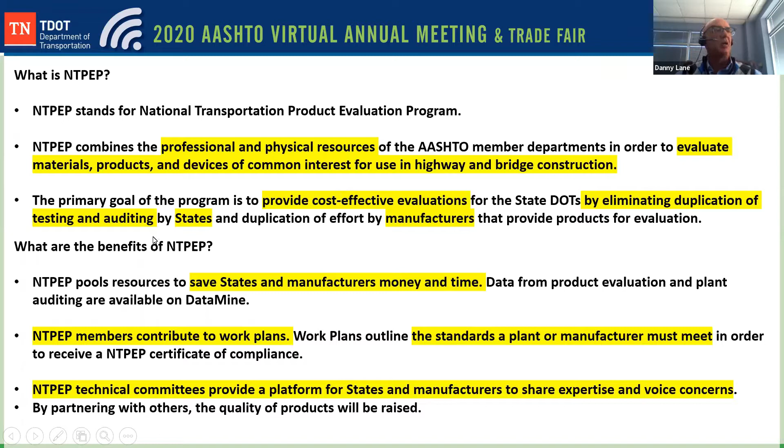So let's get started. Of course, you remember I told you I did this for the big annual AASHTO virtual annual meeting and trade fair. So I had to go through explaining a lot about what NTPEP is, and of course everybody on this call knows what NTPEP is, but I was doing this for the CEOs, so we thought they needed a little background.

Right now, Tennessee DOT has around 3,000 products on a QPL. Guys, over 1,500 of those products currently come from NTPEP evaluations. Guess what? We don't have to do that in the lab. That's half of our QPL products, and I'll show you later how that really shows up in our QPL. We don't have to do this. We can concentrate on something else. That's the confidence we have in this program over the years, and it gets better every year.

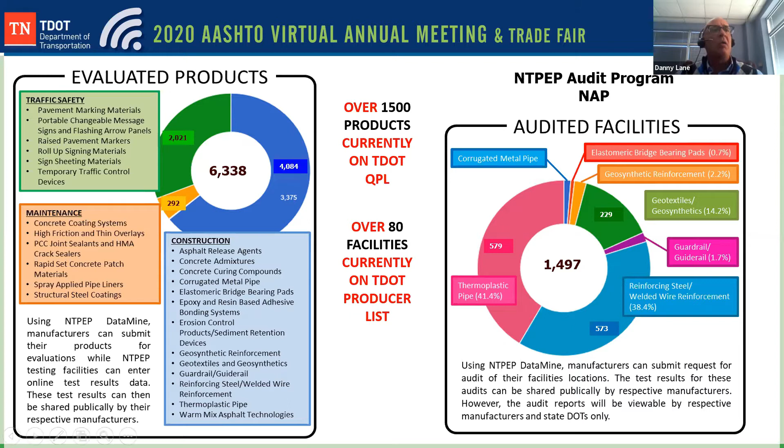Over 6,000 products evaluated, 1,497 audited facilities. Well, 80 of those facilities are on our producer list, and I'll show you how to get on that. So we are all in on this NTPEP.

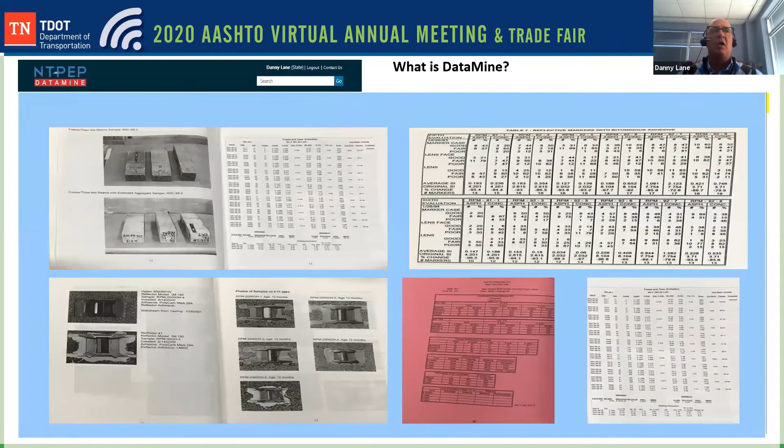Of course, I explain to them what DataMine is, the online repository, and then I show them exactly what DataMine looked like years ago. Some of you guys on this call have seen a lot of these books. We used to have stacks of them, and instead of clicking on geotextiles or concrete admixtures like you do with DataMine, you had to thumb through the pages and look for yourself. Guess what? At the time, this worked unbelievably well. We loved it. But now we have this online repository at your fingertips, and this is what you get.

So really, guys, it's a very powerful tool at your fingertips that you can use to look at specs, write your specs around whatever you want to do, and it's pictures, graphs, testing reports, and everything. It's before and after type stuff.

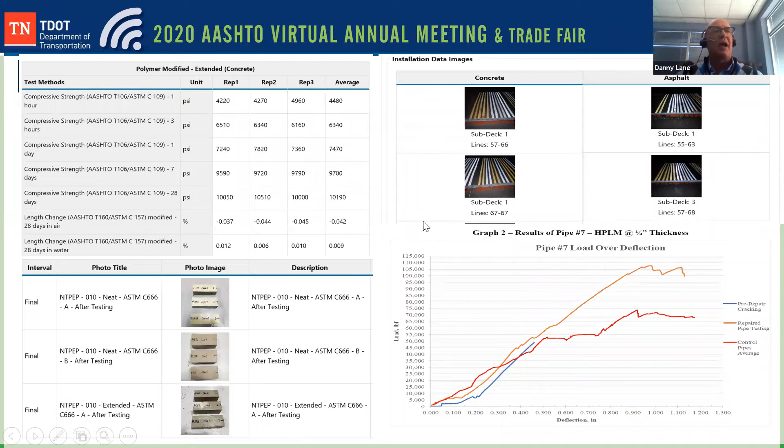It's really, really useful, guys. It is a partnership between state agencies and industries. So if a state is not accepting NTPEP evaluations and they're doing third-party testing, that industry will not go to NTPEP. But now more states are accepting NTPEP, and the industry is running to us. And that's how it works.

The strength of our committees, our technical chairs and vice chairs, and technical committee members. You don't have to be a chair or vice chair to contribute to these product evaluations. A lot of you guys are experts sitting in the audience, and a lot of you step up. That's really good. But it is a partnership between state agencies and industry partners, and that's the way it has to work. It's worked very, very well in the state of Tennessee.

This is what I showed our CEO when he first got here, about the $20,000 annual contribution and what we get out of that contribution. And I'm getting ready to show you savings, quality, reliability, independent test results. Guess what? Independent test results from all the same place. Now, it may be a contracted lab, but every product goes through that same lab. It works out really well. Everybody's treated the same.

Sharing the experience and partnering with the industry is one of the best things we've ever done, and we figured out a lot of things together, and it works out really well.

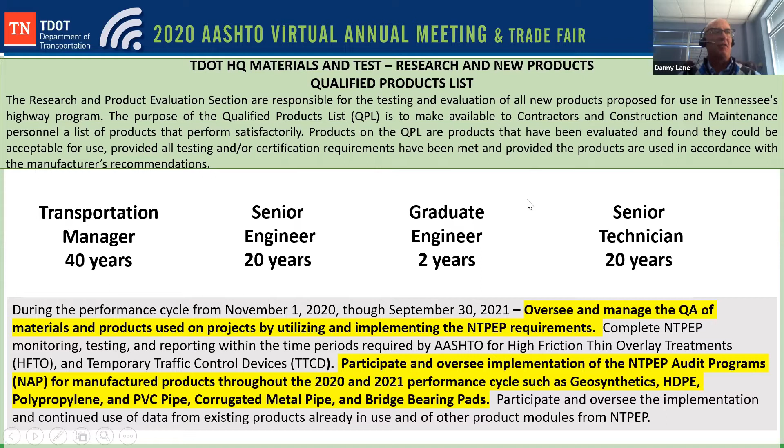Our graduate engineer covers the whole NTPEP audit program by himself, and I'll show you how that happens. So, guys, this is not rocket science, and it makes us look really, really good to our CEOs and everyone else in our department.

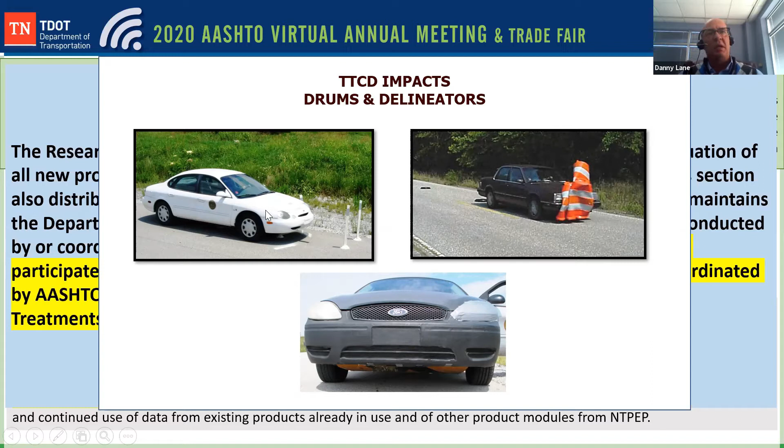We've always participated in NTPEP. Of course, most of y'all know that we used to do delineators and drums. We no longer do the delineators, TTI has taken that over. Richard Weber and Al Wilda have done such a great job continuing that effort with TTI, and I thank them both. We still do the impact and durability testing for the work zone drums.

We have also participated in hosting test decks. In 2016 and 2017 we hosted the HFTO test decks. Previously, before that, Kentucky had the test decks, and hopefully this year, I'm pretty sure it's a guarantee, Missouri is going to host the 3rd test deck for HFTO.

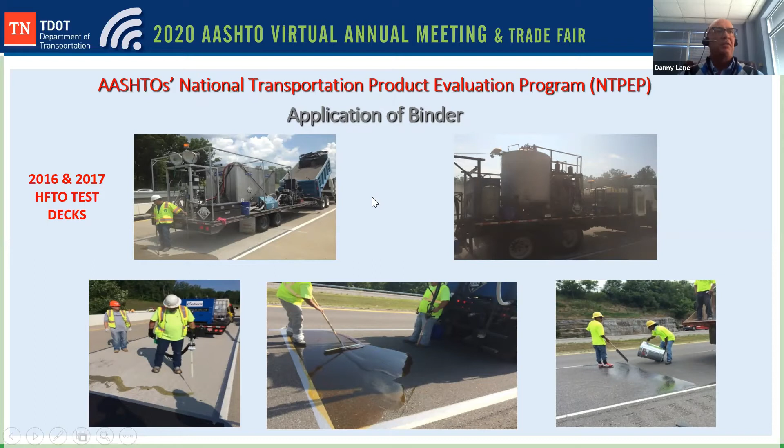I want you to look at something. This is a 3-year evaluation. We do it on asphalt pavement, concrete pavement, and concrete bridge decks. Remember, the concrete bridge decks get a double layer.

So the asphalt pavement and concrete pavement for HFTO is exactly what it is. The double lift on the concrete bridges is a bridge preservation type program that we've used for years, and we're getting ready to start on brand new bridges to get this double layer on it, so we don't have to touch it or even think about it for at least 10 to 15 years.

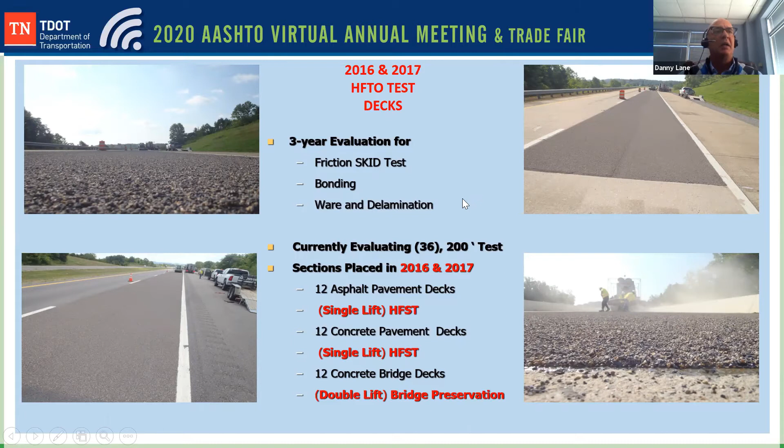So that works out. You see this number right here, this 36? We did 36 sections in the state of Tennessee alone. Kentucky did not quite that many, but there's probably over 45 products. Remember this number, over 45 products that have been evaluated by those 2 test decks, okay?

And what we do, guys, when we switch from one program, whether it's a specification, a standard drawing, or anything like that, when we decide how we're going to evaluate these products and we're going to switch to NTPEP, we give about 6 months to a year grace period to get the word out to our road builders, get the word out to contractors and everyone, that we're going to be in the future accepting only products from the NTPEP program.

And that we've always done that. And once we put it in place, we start over from there. And I'll show you some of the effects that have happened to us.

If you go to our webpage, and I will be sending this link out to Catherine, when you look at our QPL, this 45 list, you'll see that with the circles over here, you've got the procedures for each QPL.

Traffic control materials covers pavement marking, snowplowable RPMs, and anything to do with traffic controls. There's several sections inside that: there's the procedures, and then there's the products.

What happens is we write the procedures. We say, you know, this is raised and snowplowable retroreflective pavement markers. We've got an NTPEP review down there, if you'll notice, and we have a link so you can go and check everything out. And then we have our procedures and what we say these products have to meet so we can get them on our QPL list.

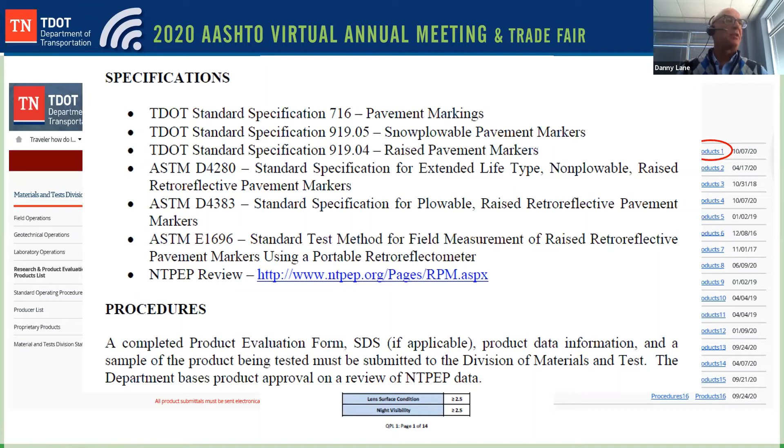And what happens after that? Site manager. It goes straight to site manager and populates in each category or each QPL list. This has worked very well.

We update the QPL every month, so if products are taken out, removed, or actually placed on, excuse me.

We do this for our bid lettings, so we know at the time a contract is let what products are on it. Contractors can get their prices and make bids. But guess what? When that contract goes to project and it's time to lay the product, if it's been removed from the QPL, they have to choose another. So it's kind of a policing thing. You may make it this month, but if you haven't been performing or didn't recertify, you may come off the next month. That's why we update it the first of every month.

If you'll notice, I'm going to go through these 45 lists, not each and every one, just talk about a few of them. Everything in red is NTPEP evaluated products. Traffic control materials, I showed you the procedures for that.

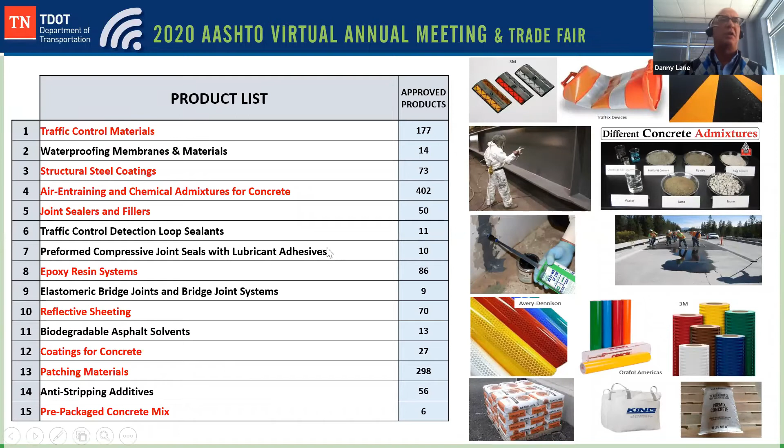Structural steel coatings, about 4 or 5 years ago we used to have it in the spec book - primer, tie coat, and top coat - with several products all over the place. We got with our Northeast friends in NTPEP, and they do the NEPCOAT QPL. We accepted that NEPCOAT QPL on all new structures. For infield corrections and repainting, we still have a separate QPL, but all new structures have to go through the NEPCOAT QPL - anything being done brand new.

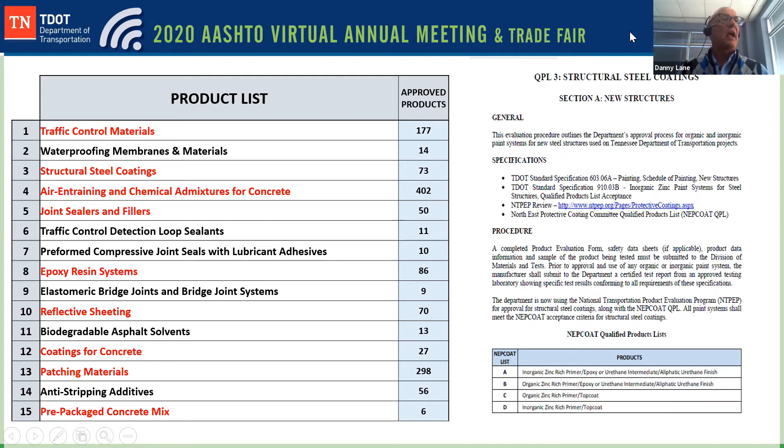Air entraining and chemical admixtures - we work with our field ops that does mix designs. An admixture isn't actually a line item, it's in a lump sum with a mix design. What happens is we update our field ops mix design drop-down list with all the admixtures that are approved. So when the designer and contractor want to submit a mix design, he knows what he gets to choose from on approved admixtures in the state. That's 402.

Patching materials alone - good guys, our guys from Ohio do a really good job with this. We actually have 2 more QPLs that play off just the data, and I've shown this to most of y'all. Just from Rapid Set data, we've written 2 more QPLs, but you have to go through NTPEP to do that. One is bag mixes for less than 2 yards per day, and the other is closure pour material. We're really excited about the data we get from these NTPEP programs - if you look at that data, you'll learn a lot about these types of products.

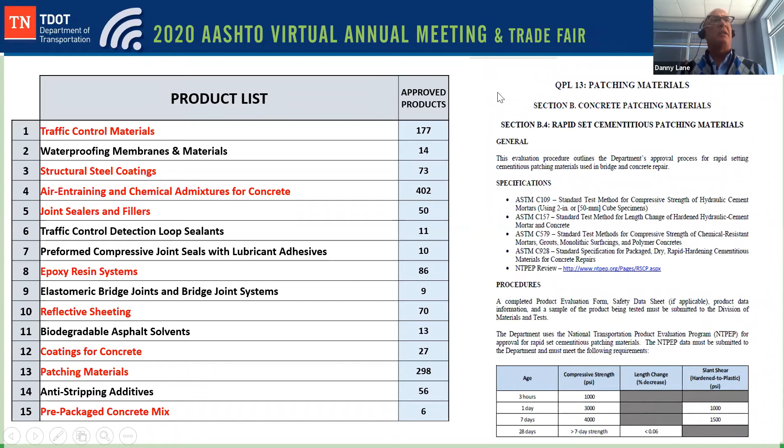Let me back up one more real quick, sorry - prepackaged concrete mixes, patching materials. Coatings for concrete is one we're currently trying to develop, and we're going to go full NTPEP when everything gets up and products get more populated.

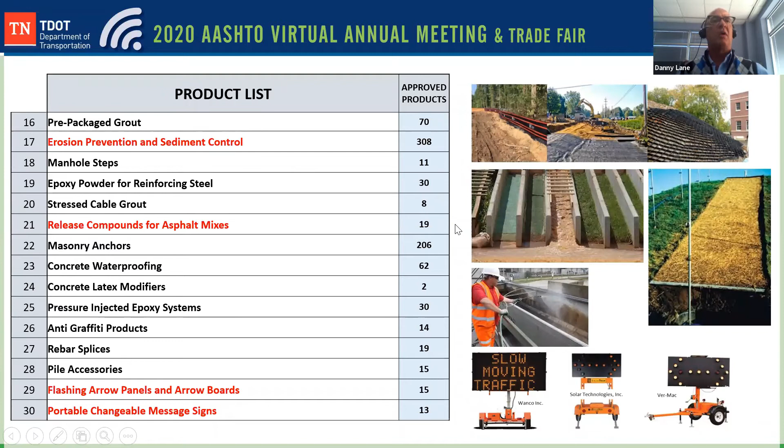Erosion prevention and sediment control - the state personnel that went to Greenville the last 2 or 3 years for the annual meeting got to go out there and try the environmental testing. It was unbelievable, and why would we not be doing this and using this? So we're all in on it. We're revamping our program now because rolled erosion controls with the nettings are becoming a factor out there in the real world, close to streams and such, for the little critters like lizards, snakes, and bugs. So the use of that is becoming really, really restricted.

So we're looking at hydraulically applied products, which we have on our list, but we're using the NTPEP data and the ECTC factors for both rolled erosion and hydraulically applied. We're looking at that, and it's worked out well because they're only going to be using NTPEP data to do this.

Release compounds for asphalt mixtures - guys, we used to do all this testing in-house, every bit of it, before Richard Wimmerly in Texas took it over and rewrote it. We did a lot of the tests they actually performed. But here's the deal - there's only 19 products on this list right now. At one time we had 121, and that was performed by us in the laboratory. We never even get this stuff out anymore. We have NTPEP taking care of everything on our release compounds. And guess what? 19 is a lot easier to choose from for a contractor instead of 121.

Flashing arrow panels and portable changeable message signs - we were in on the very initial work plan on this. Meredith McDermott from North Carolina was really big into this at the time, and we've accepted this from day one. Everybody knows it - the flashing arrow panel suppliers and message sign suppliers all know, and they always ask, why don't y'all do what Tennessee does? Everything's in there, all the procedures, everything is in place. Everybody plays by the same game.

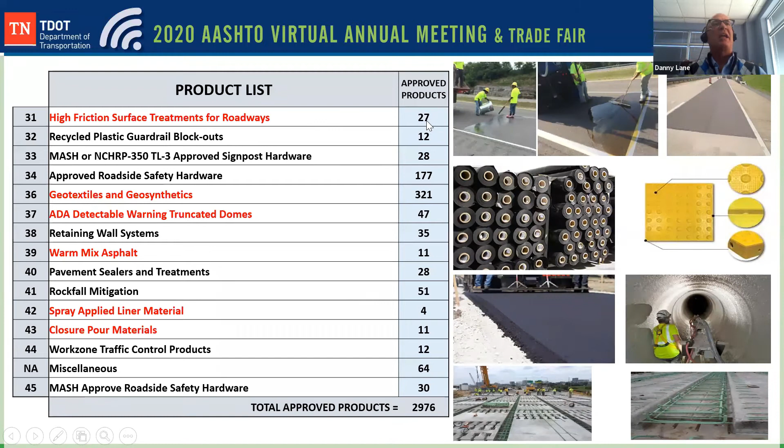High friction surface treatments. Remember that number I told you to remember. Over 45 products have been evaluated through NTPEP, but look at here, guys, we only have 27 approved.

We break high friction up into asphalt roadway and concrete roadway. For concrete above grade surfaces, all bridges and all ramps above grade get a double layer. We're actually considering going back and doing the concrete roadway, if it's just for HFST, with a double layer too, and I'll tell you the reason why.

When you do a ramp or a bridge, we've already seen that the asphalt leading up to it has high friction on it, then we go do our bridge overlays. We've found that even on concrete ramps, one layer wears off a lot quicker than a double layer. As a matter of fact, we've replaced some single layers on concrete ramps with a double layer, and when you look at the bridge, there's never a mark in it because it's always been a double layer. So that's what we do.

Asphalt roadway state routes in our state last normally around 12 years, interstates around 8, so we're always turning that over. But on concrete, we wanted to do double layer so we'd never have to go out there again. Well, maybe not never, but at least 10 or 15 years. It's worked out really well for us.

Geotextiles and geosynthetics, we are real big on that, 321 products. If there's a roll that comes on our project, we know exactly where that was made, and we actually do a little bit of quality assurance on this.

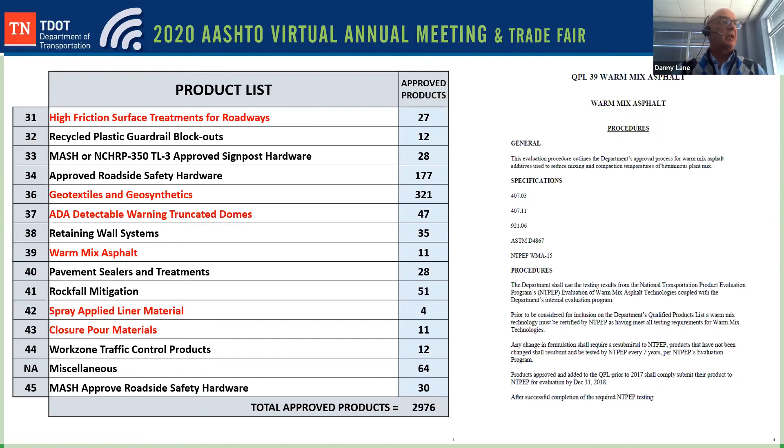Warm Mix Asphalt. We just sent out something for our asphalt stripping additives program, which is inside the Warm Mix Asphalt program. We sent out a letter giving them a year to get at least submitted, or actually tested and evaluated, by NTPEP to be on our QPL.

We've done boil tests and all this other kind of stuff in our labs for years. We don't want to do that anymore. We've got a third party, NCAT, by the way, which is one of the top labs for asphalt in the world or the country. So why not? Why would we be doing that? And everybody plays by the same game. It's really working out really well.

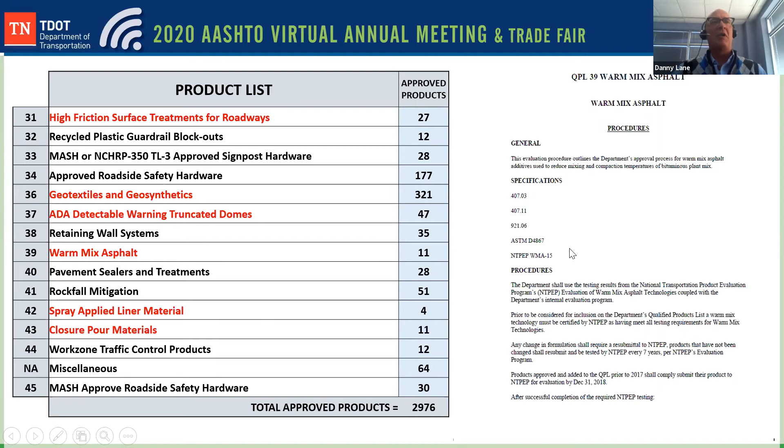Now, spray applied liners. In 2019, this was put together by our friends in Ohio, Jeff Syar, and a bunch of other people, some of you that are on this call right now.

What happened was our maintenance division was sending us emails wanting to know, do y'all know anything about spray applied liners? We had set maintenance up doing slip lining using plastic pipe and PVC for all their corrugated metal or even concrete, and a lot of companies were coming to us saying, why don't you try spray applied?

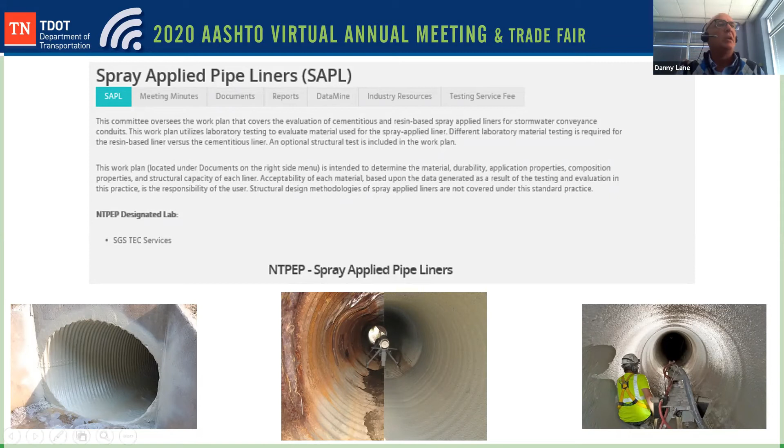And when maintenance called, I said, well, guess what? NTPEP is currently doing a spray applied liners evaluation program. So what did we do? I'll tell you what we did. We went straight to DataMine.

Now, inside this spray applied liners, there's two different types: there's resin based and there's cementitious based. There's also two different types, structural and non-structural. Well, guess what? We looked at the work plan, loved it.

We looked at the data, and we really got a lot of information. We decided that if we're going to do spray applied liners, we will allow the resin based and the cementitious based, but we both wanted them to meet structural values, which is definitely in the data that's in there.

So what we did, we put the QPL together. Now, we all know as product evaluators that resin-based material and cementitious-based material are a lot of difference in cost. The resin-based materials, the way I understand it, is more suitable for cities and municipalities that need to redo sewer lines and sewer manholes and stuff like that. And it has to be completely dry.

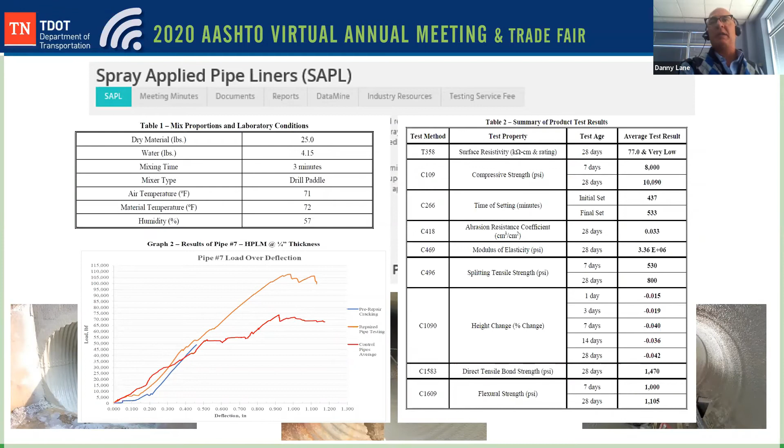Okay, we learned this through the work plan. We learned this through the information that we got from NTPEP. Cementitious, you do not have to have it completely dry. So what we did, we accepted both, but the contractor knows what he's got to do if he uses a resin base. And guess what?

We wrote a special provision. Now, that's 2019 early. By the end of 2019, we wrote this special provision. And guess what we say? Products meeting this provision shall have been submitted and evaluated through NTPEP, and then placed on a QPL for spray applied liners. Guys, that has worked so very well.

It went to contract in 2019. We got another one coming out this year. Less than one year on a brand new evaluated program, we said this is what we need. Our maintenance needed it. So that's how we set that up. It's worked out really well.

All of our QPLs with NTPEP data are referenced in the following: the spec book, of course, special provisions, standard drawings, and even plans. You don't have to say NTPEP. Just in our situation, if it's a QPL product, QPL item, you have the procedures you have to meet.

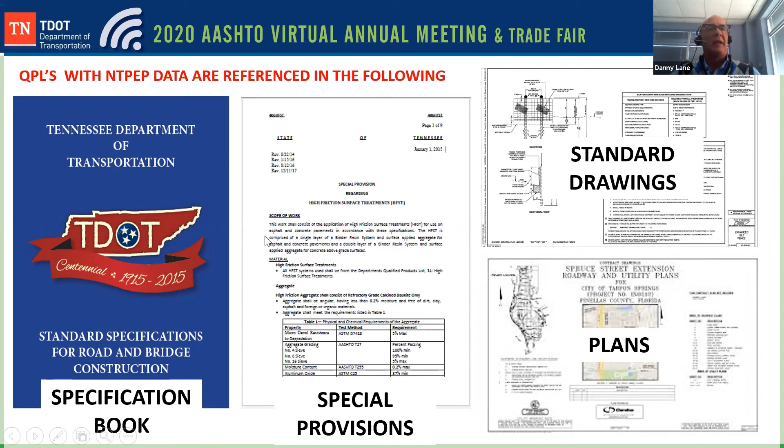What we found out 20 years ago, maybe 25, was instead of doing supplemental specifications, instead of redoing the spec book every 5 or 6 years, which we do anyway, in order to change some procedures right online and at real time, we could do it with procedures on the QPL. So all QPL items have a procedure. When they're referenced in the spec book, it says must come from the department's QPL. And so that's worked out really well for us and turned out to be a big shot in the arm.

Again, these are the divisions in Tennessee DOT that benefit from NTPEP. Of course, our construction, our inspectors, geotextiles alone, there's a QPL list, and the contractor brings out, this is a geotextile I want to use. It's a type so-and-so. And he goes, well, let's see if it's on the QPL. If it's not on the QPL, he does not get to use it.

So maintenance, of course, we talked about spray applied liners, but we do patching materials with them, design, environmental, occupational health and safety. We're doing work zone areas and stuff like that, and of course, materials and tests.

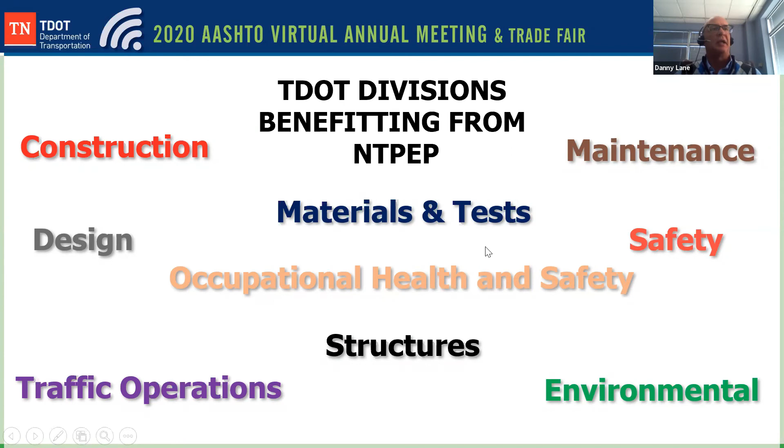Now, let's talk about the audit program, guys. Let me tell you something. We talked about on one of the other calls, one state said, yeah, we check everybody that's in our state, but if they're out of state, we get a quality assurance manual, we get this, we ask for calibrations. You're not visiting. You're not treating that guy out of state the same way you're treating your own in-state producers. So what we like is the fact that everybody, again, is treated the same.

And there is no way that our field ops section can go out and do 80 audited facilities for anywhere near the cost of this whole program. Now remember, $20,000, I'm getting product evaluations and I'm getting audited programs. And we took this completely away from our field ops sections on these products that are shown, except for the Portland blended cement. I threw that in there because it is a product evaluation program.

We're going to treat it sort of as an audit program. You don't make it here, you don't even get to come to this place, that type thing. So, but everything else has been widely accepted.

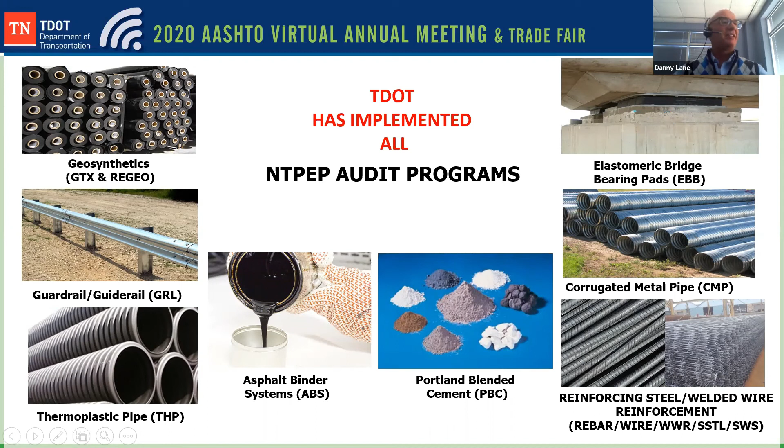We were getting bridge bearing pads from a company in Knoxville, Tennessee that got their material from somewhere in Canada. This is how this works. And we wrote the procedure saying we will not accept or do in-house testing on this, and you got to go through the NTPEP audited program. They called that supplier in Canada. Canada calls NTPEP. Now they're involved, and everything is good. See how things work? When everybody plays the same game, that's how that works.

What we do is we look at the protocol that's in, and this happens to be steel welded wire reinforcement. Take a look at these audit reports, guys.

They're covering so much, and guess why they cover so much? Because you told them to. We all put our input in on this: size and type material, certifications and test results, quality management system, and equipment calibration and standardization checking.

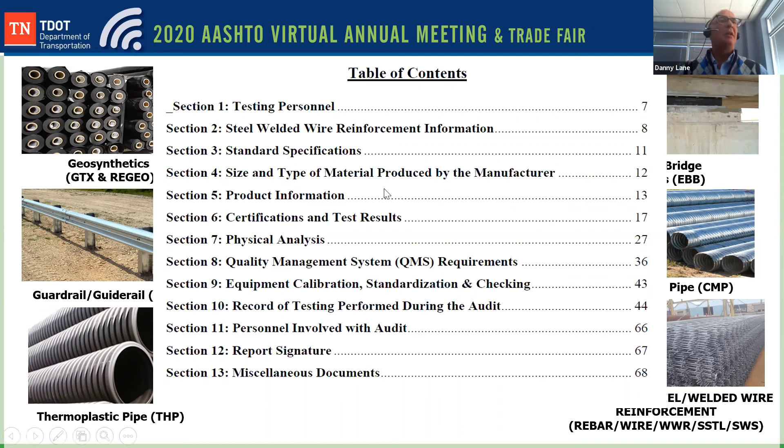That is huge. And guess what? If a manufacturer is not participating in this, there's probably a reason why, just like that third-party testing we talked about earlier. So what happens? When they do this, they get a certificate where they're good to go.

What we do is we check the certificate, of course. We look at the report, and if they had some deficiencies, they have to correct them. You will not get this certificate unless you correct them, and so when they're corrected, they get a certificate. And what do we do? We go to our producer list. Our producer list is for contractors in the state of Tennessee doing business on certain products or materials they have to get from this producer list.

So what happens? The producer list has all the concrete reinforcement or anything, all the requirements. It says that we're going to use the NTPEP audit program. We're going to review the NTPEP audit report along with corrective actions. And in order to remain on that product producer list, you've got to annually submit to the NTPEP audit report.

I am on this committee. I can name 2 or 3 products that you see on that page right there to the right that we actually asked if they would go through APEL, and they may not be on a QPL, because really APEL is for products that don't necessarily exactly fit the NTPEP program, but it gives a supplier or manufacturer an out to go and get his product looked at and send it out to the other states.

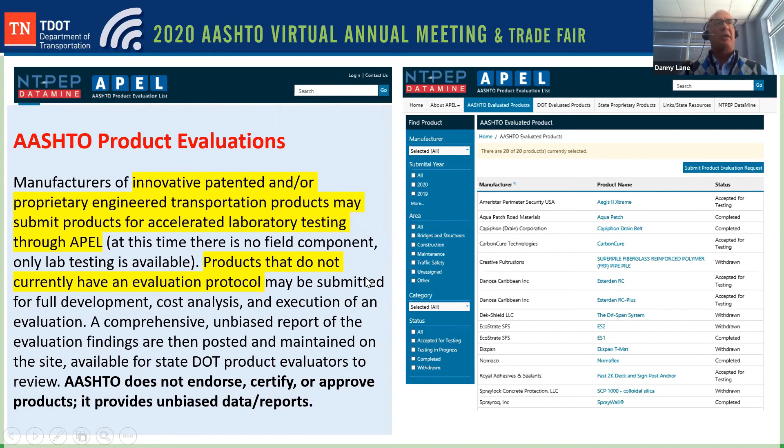DOT product evaluations, I have used this over the years a whole lot. A lot of these states, and you guys, I'm talking about you guys, y'all do a lot of good work. You are experts in your field. So this is what you do, and you put it online, and you put yourself out there, and we take a look at a lot of this stuff and say, wow, that's pretty good.

I didn't even think about this. I didn't think about that. Well, guess what? You guys are the experts. That's why I like going and looking and seeing what's going on, especially if I know something's been evaluated by another DOT, and that same manufacturer or supplier comes in and says, oh, we can do this, we can do that. I'll go back and check them. Usually the DOT that did the evaluation says, well, that's not quite right, or yeah, you're dead on.

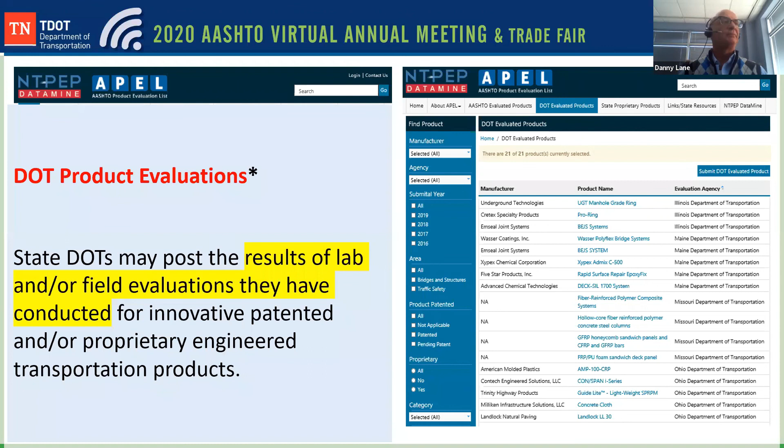State proprietary products, that stuff's changed. Of course, you know the CFR is gone. We still kind of do the CFR. We took all the federal wording out. And so we still kind of follow the CFR because we like keeping up with it per project. We like keeping up with it based on a certification, public interest finding, or anything like that. So we still kind of do it. We just took all the federal stuff out.

Now, this is what I showed my CEO when he comes to learn about everything that we do. I said $20,000 annually. Guess what, guys? When I showed you those 4 people in the research and product evaluation section, that $20,000 annually is less than 1 month of salary for that section. So the commissioner's looking at me like, wait a minute, half of the QPL is done by less than 1 month of your salary? I said, yes, but that lets us concentrate on a lot of other things.

And he's laughing because he knows that we put something in place that saved the department money. And he looks me dead in the eye. He goes, well, Mr. Lane, that's a no-brainer. I said, yes, sir, it is.

So I feel really good. I look really good in my state by saving our state money, and we get to concentrate the time we spend on doing these product evaluations. We get to spend time looking at other things to do and improving our own state. So we're really excited about it. We believe in it and have a lot of good experience with it.